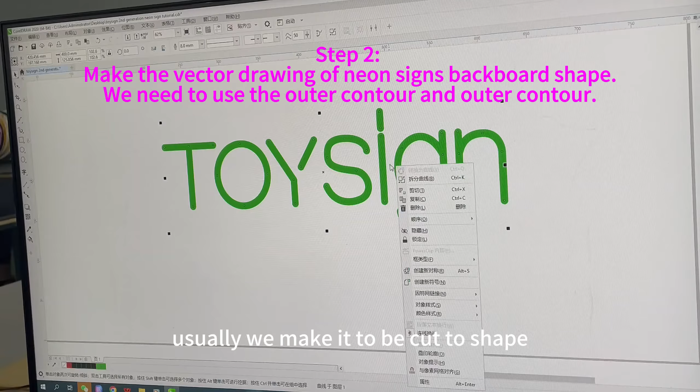Select all the single lines vector drawing, then right-click to find property and left-click it. We find outline drawing and left-click to select it. Select outer contour and make it 50 millimeter. Then, right-click the outline drawing and divide them. Next, left-click to select outline drawing, find inner contour and enter 20 millimeter. Then, right-click inner contour to divide them and delete the outer contour.

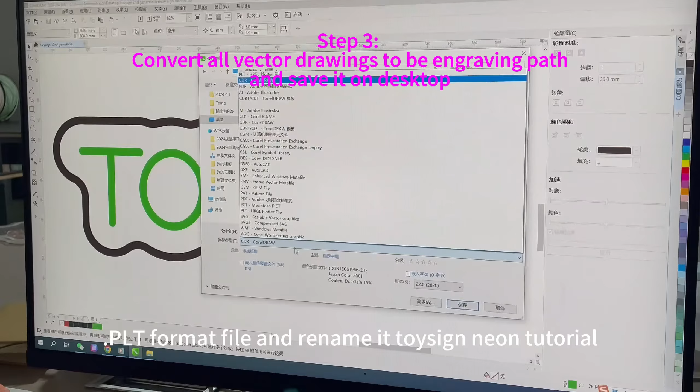We got it! Third step, we need to convert the vector drawing to be engraving path file. Save the file on desktop in .plt format file and rename it ToySign Neon Tutorial. Look at this symbol. It is software to set parameter of neon sign vector drawing to carve neon tracks and cut out backboard. We open the software. Then, input the ToySign Neon Tutorial.plt file we saved before.

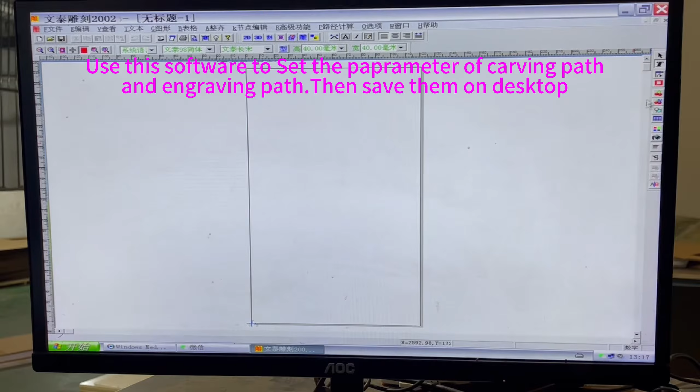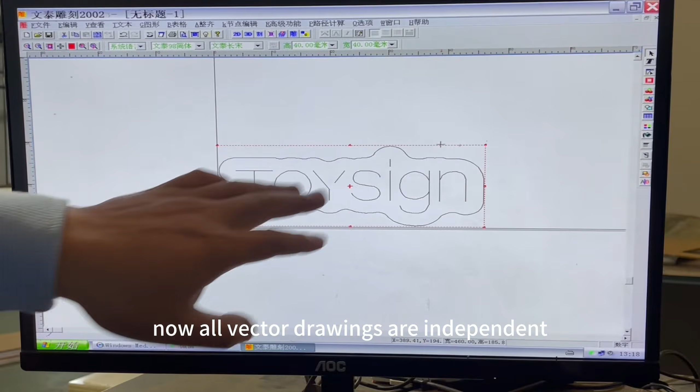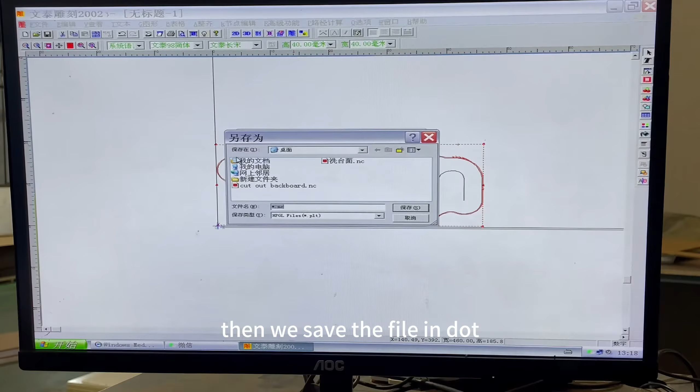Move the neon sign vector drawing to the left bottom. Split the vector drawing. Now all vector drawings are independent. Only select the backboard outline vector drawing. Click this symbol. Select this item to cut out along outer contour. Set the engraved depth to be 6 mm, which is as same thick as the backboard. Then, we save the file in .nc format file and rename it Cutout Backboard.

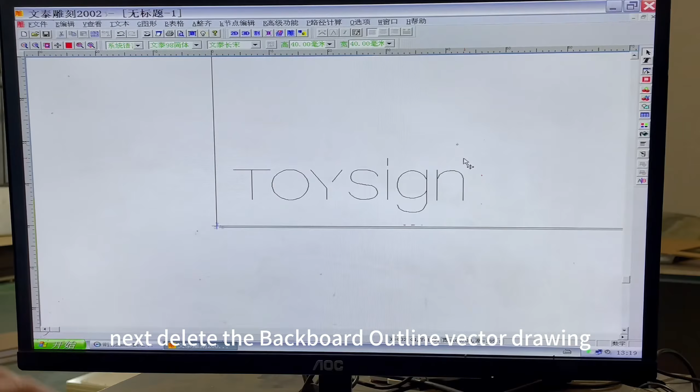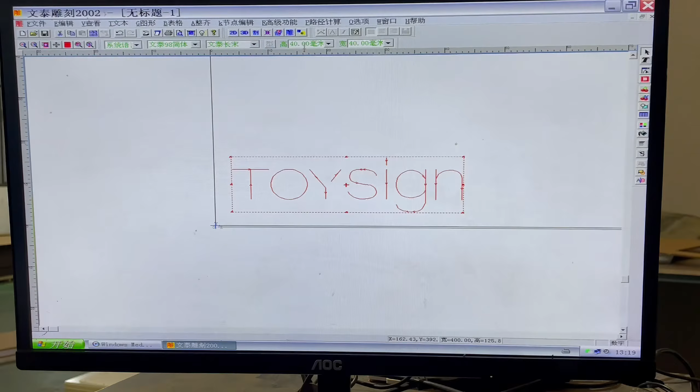Next, delete the backboard outline vector drawing. Select all the neon tracks vector drawings. Click this symbol. Select this item to carve along the original lines. Set the carving depth to be 4.2 mm. We will install LED strips and silicone tubes there. Then, we save the file in .nc format file and rename it Neon Tracks.

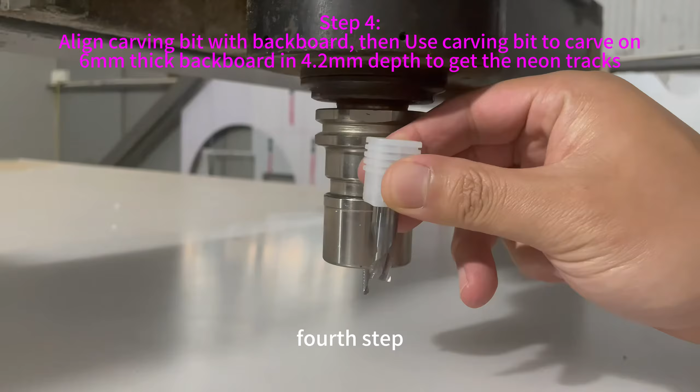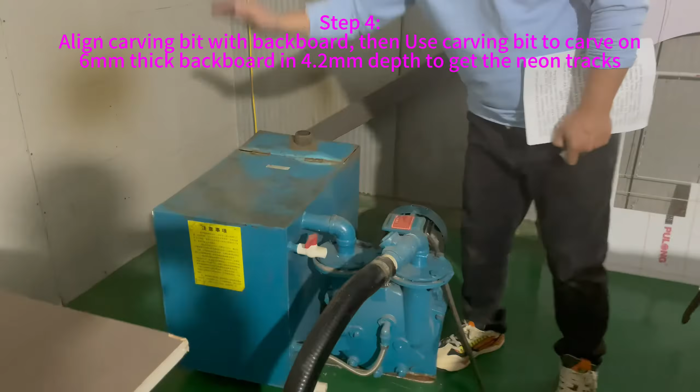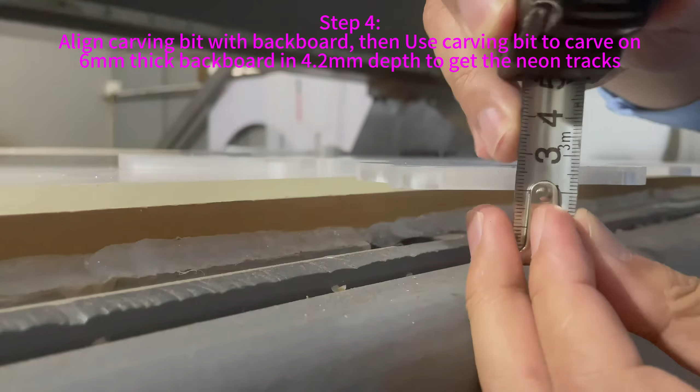Fourth step, align the CNC router bit with neon sign's backboard. Look, this is our CNC router. The CNC router needs to have vacuum absorption function to fix the backboard firmly. This is vacuum pump. Usually we use 6 mm thick plexiglass board or acrylic board as neon sign's backboard. This is 6 mm thick plexiglass board. Look, this is special design carving bit to make 6 mm thick neon sign. We will use it to carve 4.2 mm depth on backboard.

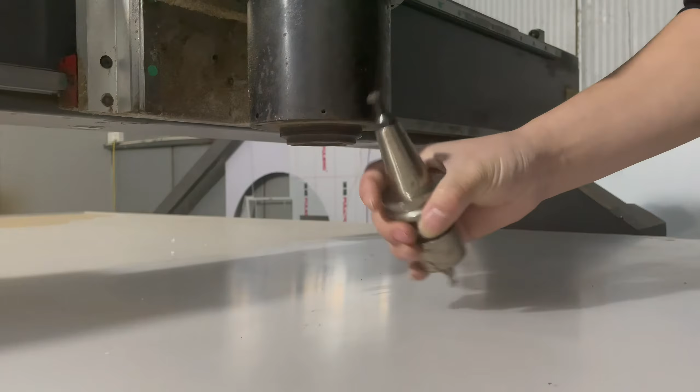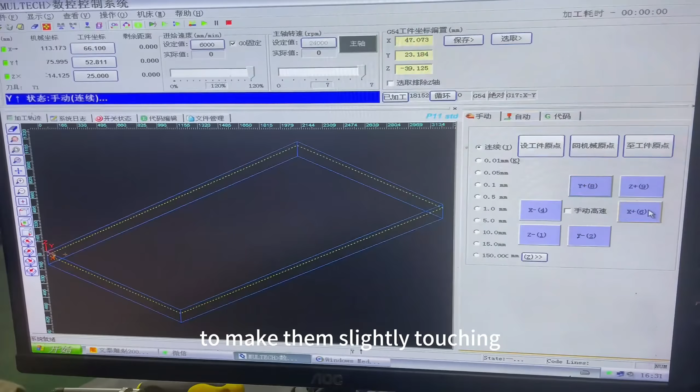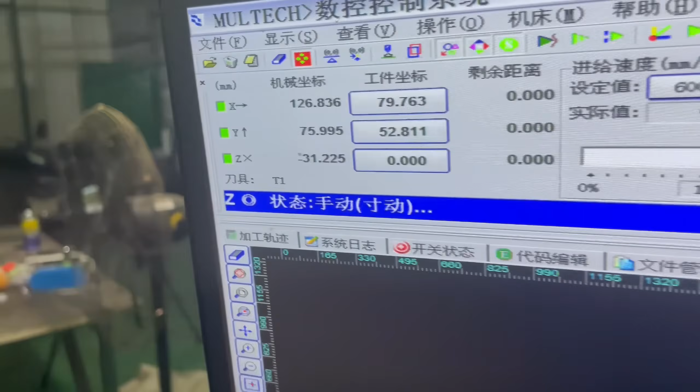Fix the carving bit on CNC router firmly. Look at this software symbol. Its function is to control the CNC router. Now, I open the software. Then, we can align the carving bit bottom with the top of backboard to make them slightly touching. Now, we need to set the Z-axis to be 0. Click here. Then, we move the carving bit to original 0 position.

We start to carve the neon track. Input the Neon Tracks NC file we once saved on desktop. Then, we can click Start button to carve.

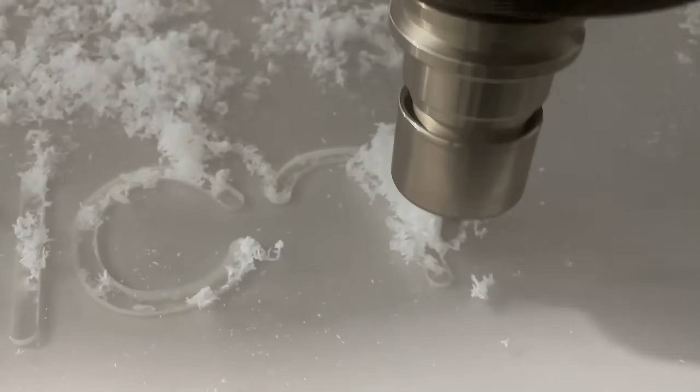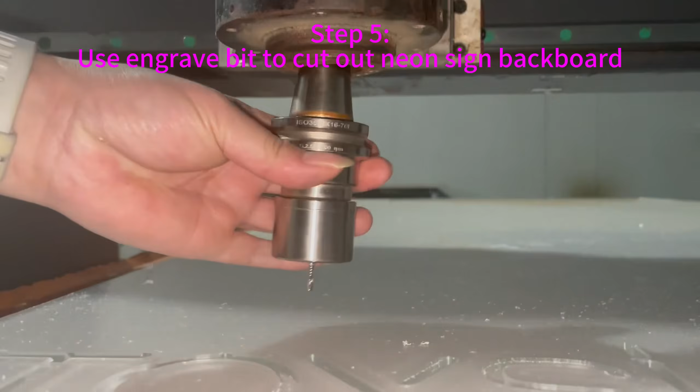Fifth step, change the carving bit with engrave bit to cut out. We remove the carving bit. This is the engrave bit. We fix the engrave bit on CNC router firmly. Open the CNC router software. Align the engrave bit bottom with the top of backboard to make them slightly touching.

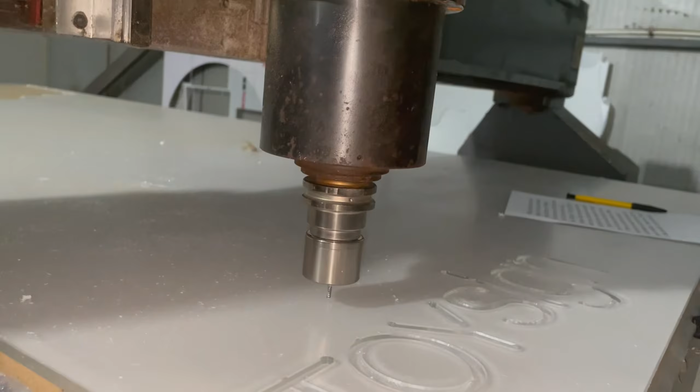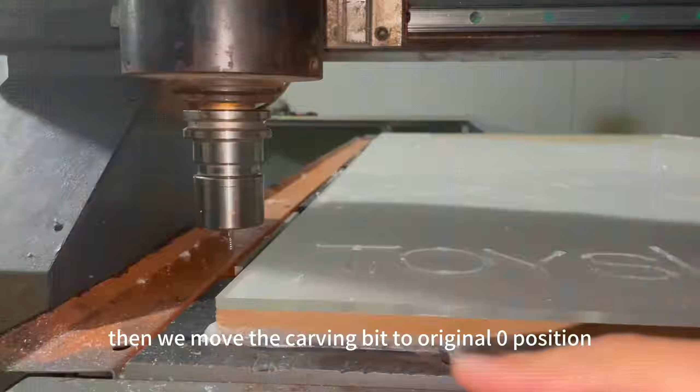Now we need to set the Z-axis to be 0. Click here. Then, we move the carving bit to original 0 position. We input the cutout backboard vector drawing, which we saved on desktop. Now, we start to cut out backboard.

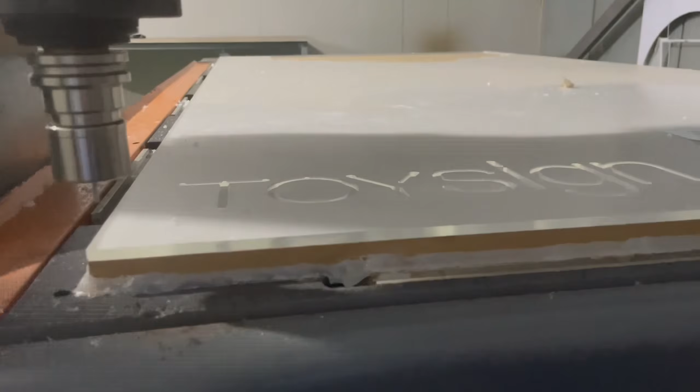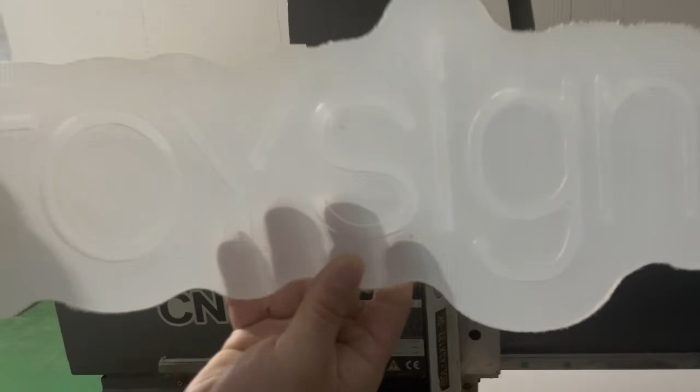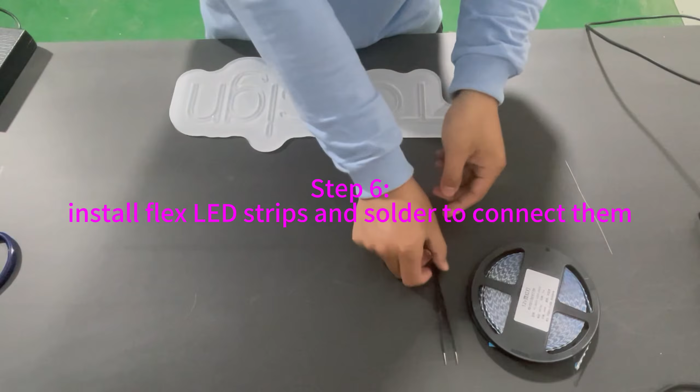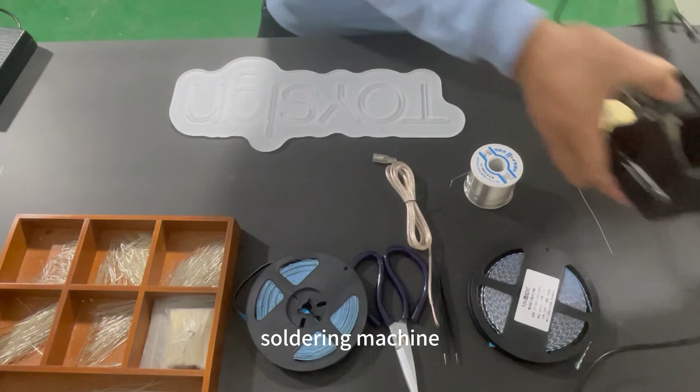Sixth step, install the flex LED strips and connect them together. We need flex LED strips, tweezers, scissors, light blocking tapes, enameled copper wire, tin wires, female DC cord, soldering machine, hand drill, power supply adapter. Set the working temperature of the soldering machine to 360 degrees Celsius.

Okay, let's begin to install the flex LED strips now. I will fast forward here.

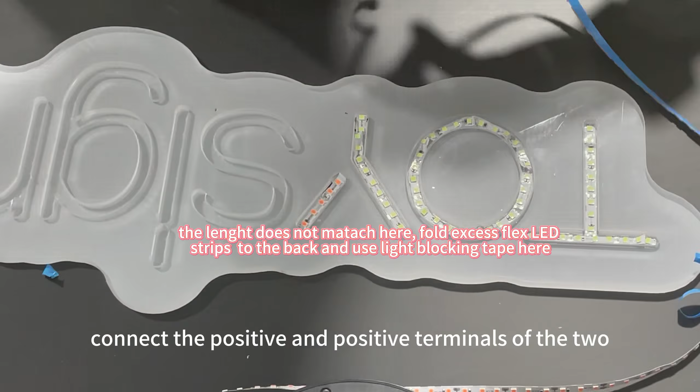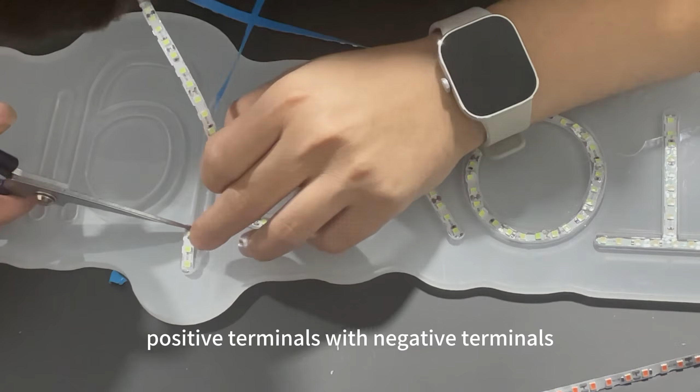Solder enameled wire or transparent wire to the soldering point of the flex LED strips. Connect the positive and positive terminals of the 2 disconnected LED strips, and connect the negative and negative terminals of the 2 disconnected LED strips. Never connect positive terminals with negative terminals. After connecting all of them together, turn on all the flex LED strips to test.

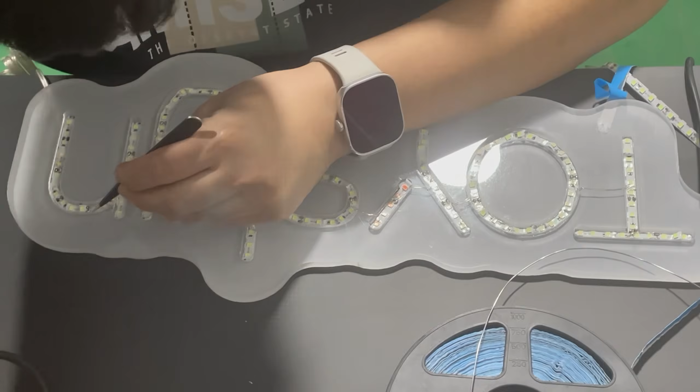7th step, install the silicone tube. We need silicone tube, utility knife, right angle knife, round knife, 403 stick glue and silicone cleaner, screwdriver.